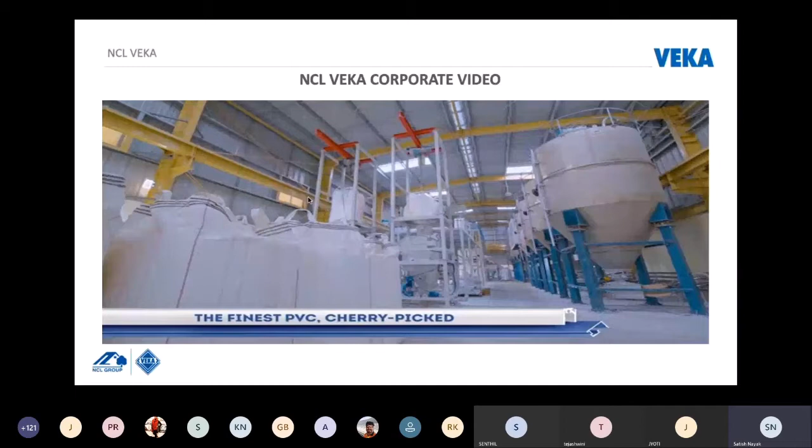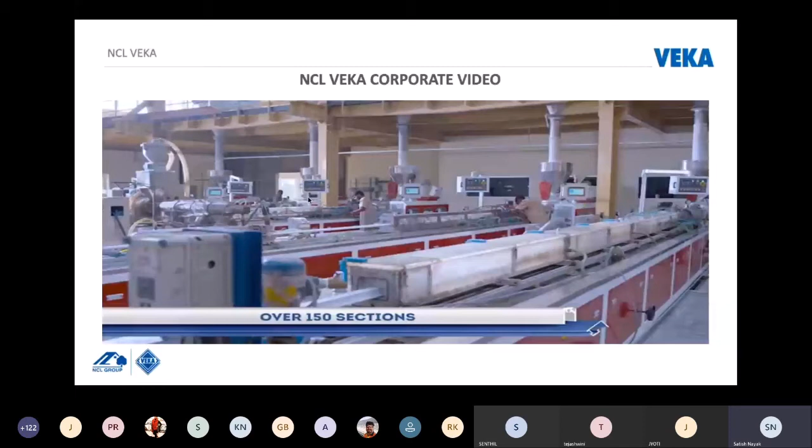A window is perfect, or it is not. We build them, so it is never not. We are Veka - German and Indian, with 90 years of combined experience. We are capable of a breathtaking 18,000 ton manufacturing capacity. We are obsessed with quality and have an unrelenting attention to detail. Everything we build is class leading and crafted to German precision - precise, accurate, flawless, strong, safe, noiseless, green, and environmentally friendly. We offer a range as broad as it is deep: casement series, sliding series, combination systems, arch windows, tilt and turn windows, slide and fold doors, tilt and slide sleeves, with screw and mesh windows. But it's not just what we make, it's how we make it. We cherry pick the finest PVC, achieve the finest blend for durability, strength, and aesthetics, cast it into some of the world's best profiles. We test every inch we produce to industry-leading quality standards, and combine profiles with accessories that are equally world-class - all in a factory that is easily India's largest and one of the world's finest: 150,000 square feet, 18 extrusion lines, over 150 sections. But what sets Veka apart is more than cutting-edge manufacturing - we have the largest network of authorized fabricators, count some of the biggest names among our clients, and have delivered prestigious and challenging projects across India. Welcome to a world that is perfect by design. Veka, made perfect, stays perfect.

I hope you all enjoyed the video. So I'll start my presentation with the PPT.

NCL Veka Limited is a joint venture between NCL Group from Hyderabad and Veka AG from Sendenhorst, Germany. The two giants have combined experience of more than 90 years in window manufacturing. NCL Group is a 2000 crore turnover company with more than 40 years of industrial excellence. Some of the products dealt by NCL Group are cement, which is the main product.

NCL mainly stands for Nagarjuna Cement Limited. Next comes the Bison panel or Bison board, which is nothing but cement particle boards. We also deal with RMC, ready mix concrete.

Next is NCL Buildtech Limited, who are mainly into Alltek paints and putties and experts in sectional steel window manufacturing. We also have something called Dura doors, which are flush doors, generally used for balconies and toilet doors. All these products consist of the NCL Group, which is a 2000 crore company.

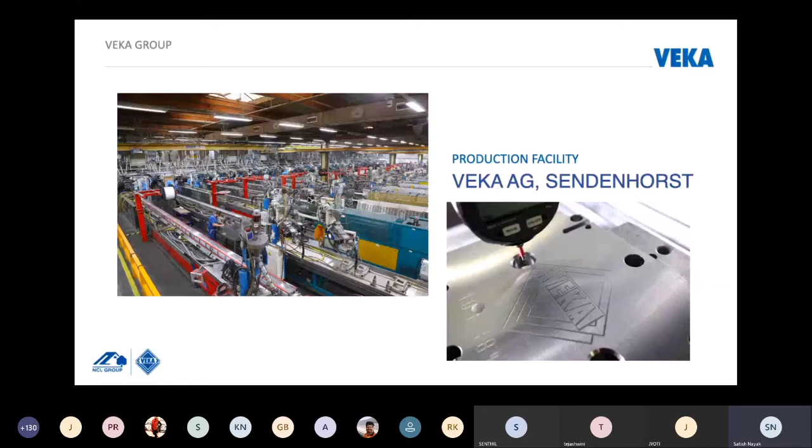Now coming to the Indian network, Veka is basically a made-in-India product and operates in two different ways. First is direct sales in some of the major cities, and the other is through our authorized channel partners or authorized fabricators. We have around 120 such authorized fabricators spread across India who deal only with Veka profiles. All our fabricators are professionally trained and equipped with sophisticated machineries to fabricate excellent quality windows and doors.

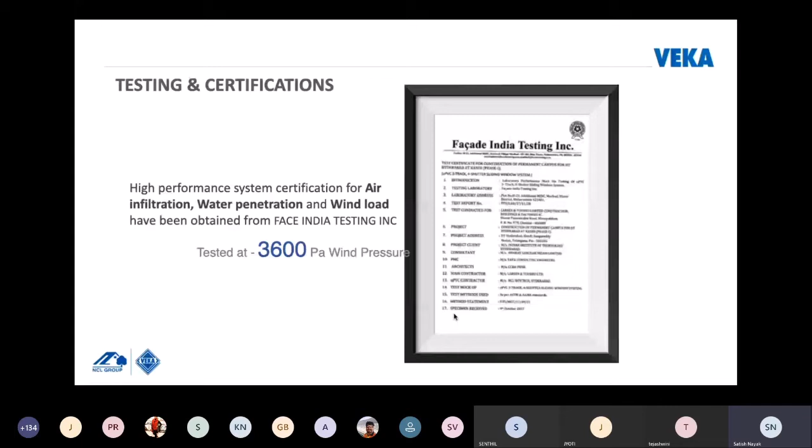Now these are some of the advantages of Veka windows. All our windows are made as per German technologies and tropical climate conditions to suit Indian climate conditions. So apart from regular sliding and openable, we also offer arch windows, bay windows, top hung, and some special windows like tilt and turn, lift and slide, and sliding and folding options also. We not only make windows, but we extrude our own profiles, and hence we call ourselves an end-to-end solution provider, so we can cater windows to different parts of India through our largest authorized fabricator network.

All our glazing beads are co-extruded and can accommodate glass from 4 mm up to 24 mm. 24 mm mainly is a DGU glass, which is used for sound insulation. We have 18 extrusion lines, as I told you earlier, which is the largest in India. All our profiles are extruded as per EN 12608 standards, and these are some of the other standards we follow.

Our main USP is the gasket, called TPE gasket. TPE stands for thermoplastic elastomers, which is extruded along with the profile in our extrusion unit and comes with a 10 year warranty. These gaskets are a little better than the regular EPDM gasket found in general aluminum windows or other windows, and these are weldable also. EPDM gaskets are not weldable.

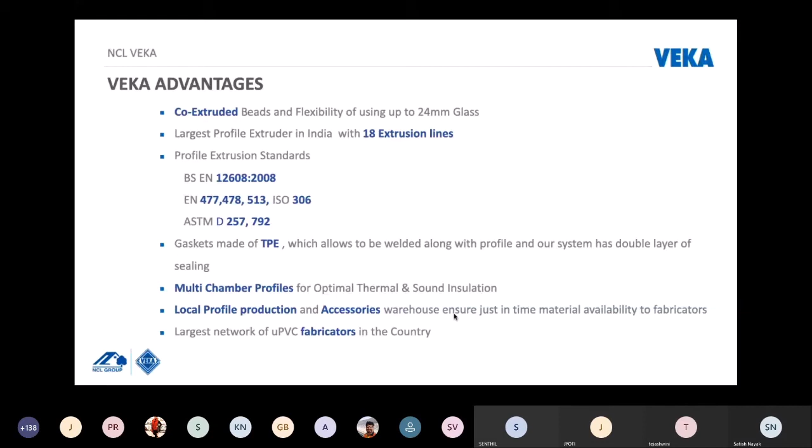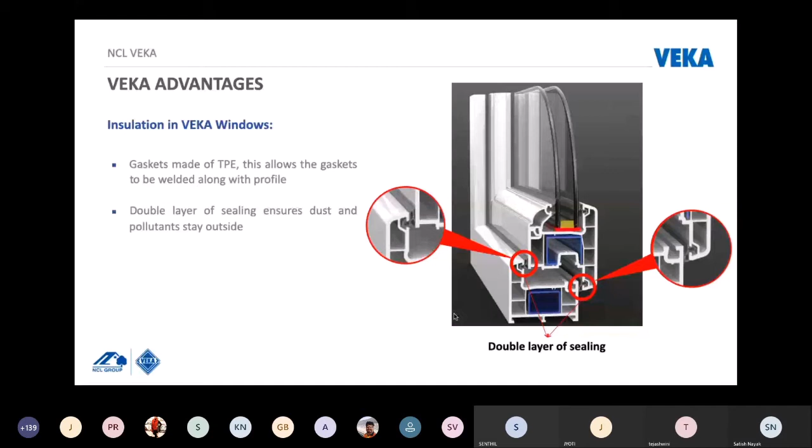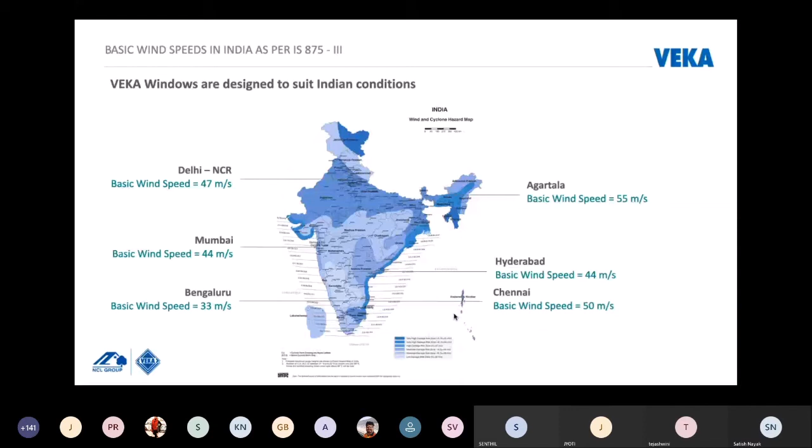So at NCL Veka we just don't put windows together, we engineer them to be perfect. Our UPVC resins are sourced mainly from Reliance, a rigid high strength material designed for robust usage in the construction industry, which is easy to process, recyclable, and very safe for domestic and industrial applications.

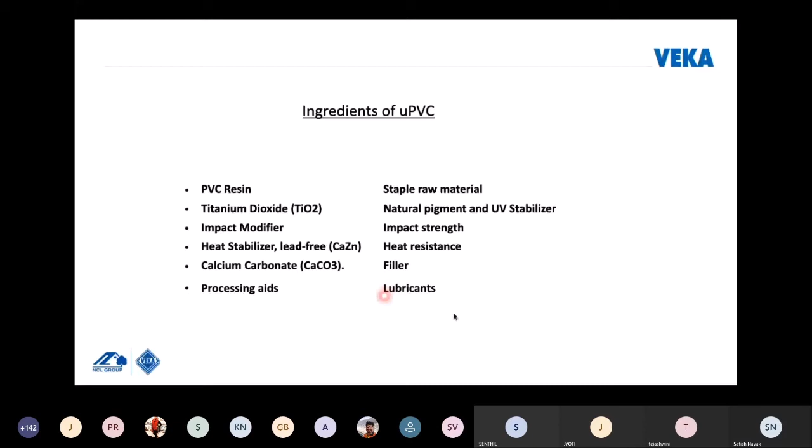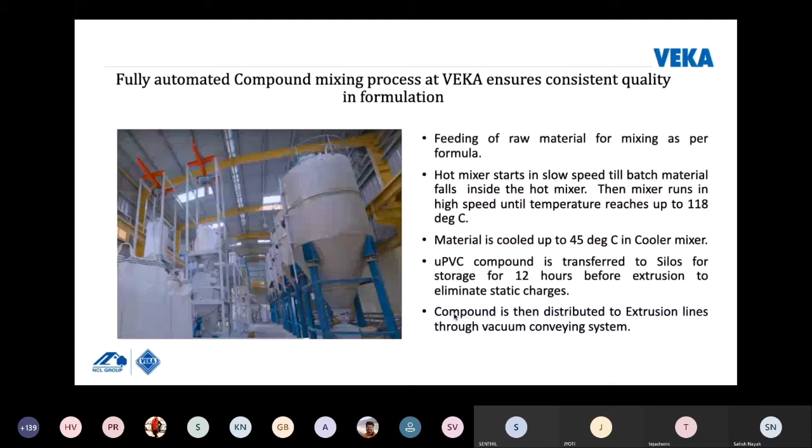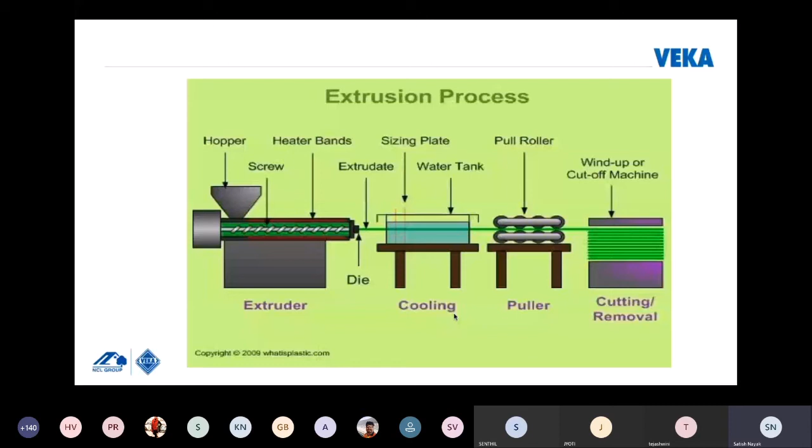Now coming to the technical part, we have different series both in sliding as well as casement. In sliding we have I-44 series, I-50 series, I-60 series, 64 series and 75 series. In casement or openable we have I-39 series or I-60 series. So now you may be wondering what are these different types of series.

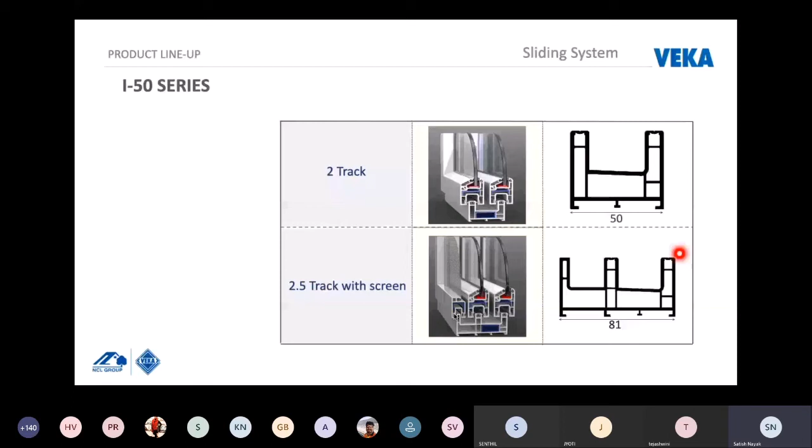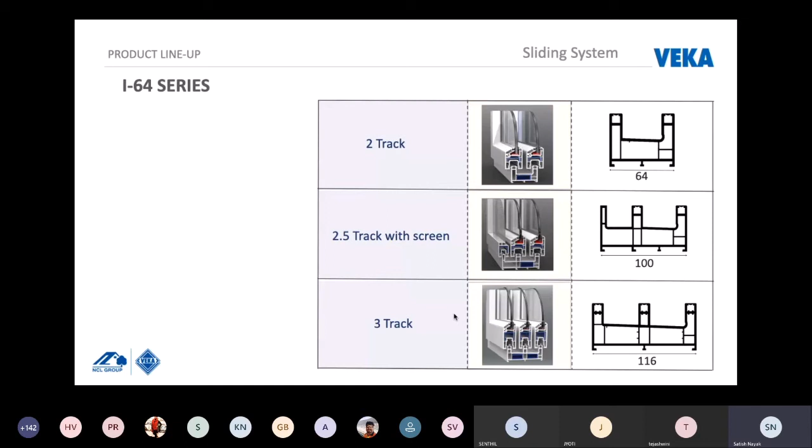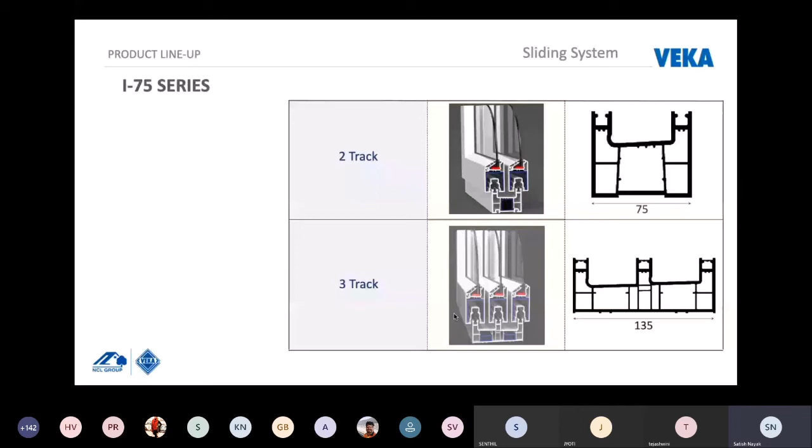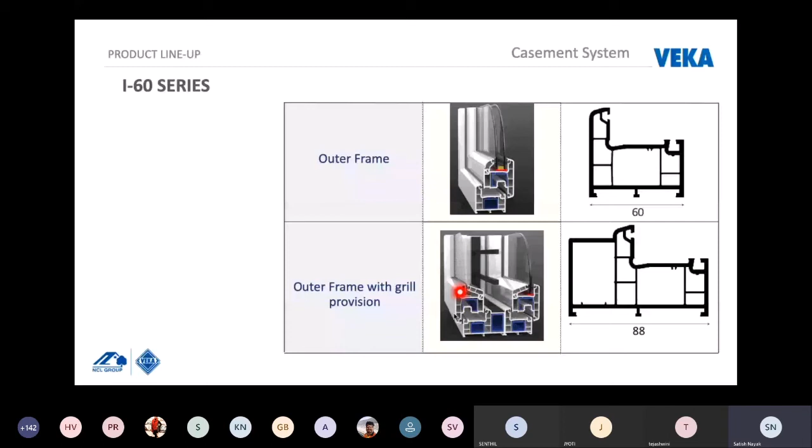So these are the main series in sliding. Now coming to openable: we have regular casement frame 60 mm, and we also have a frame with inbuilt grill inside openable mesh. Suppose if you have seen the old wooden window, there will be a center grill. If required, you can open mesh inside, glass outside. This is the same typical setup, but made with UPVC.

Now these are some of the compact series. We have both casement and sliding. I39 is mainly used for ventilators. You can go with top hung type with or without exhaust fan provision, or with glass louvers or UPVC louvers. And in sliding, we have one more compact sliding series mainly used for very small sliding windows, say for size 4 feet by 4 feet and below.

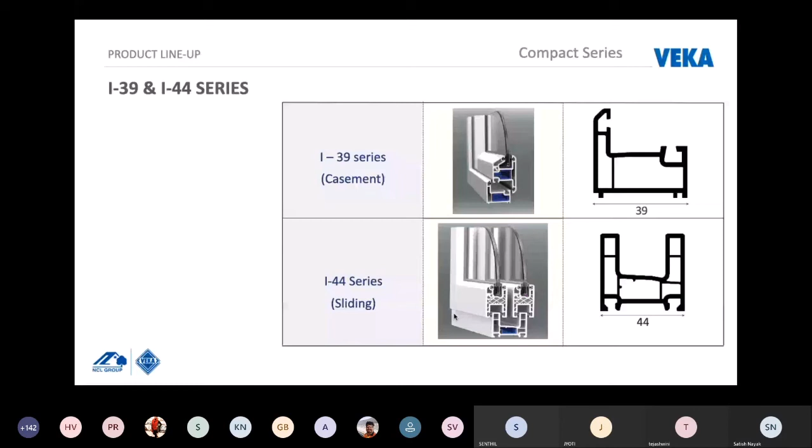So all these series which I explained till now come under VEKA I series, which are extruded in India and come under class B and class C, meaning wall thickness will range from 2.2 mm to 2.6 mm. Apart from this series, we also offer VEKA Diamond series, which is imported from VEKA factory. VEKA Diamond is basically a super premium series, which comes with 5 chambers, and wall thickness will be around 2.8 mm.

In VEKA Diamond, again we have different series like Matrix 60, SS73 and SS90 for sliding. Casement series we have AD70 and Matrix 60, and we have one more special system called lift and slide door. In this system, each shutter can go up to 3 meter width by 3 meter height. And the advantage of this system is you can lock the sliding shutter at any point of time.

Unlike other sliding windows or doors you have seen, which lock only at the corners, in lift and slide door we can lock in any portion wherever you slide. This is the advantage. And the height restriction also, you can go up to 10 feet, 3 meter.

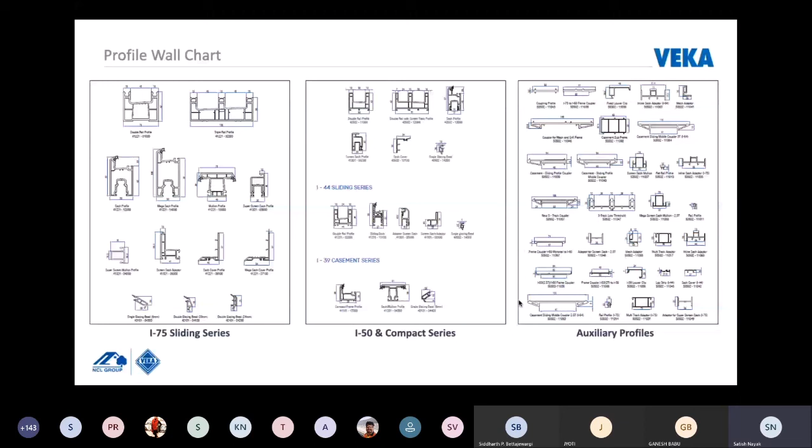So now for a window to work perfectly, there should be proper hardware as well. Our main specialty is we are also into hardware under the brand name called Auben. We offer excellent quality hardware which has been tested for corrosion and durability as per international standards. And we also offer 5 years warranty to our end users. They are mainly outsourced from leading hardware manufacturers across the world.